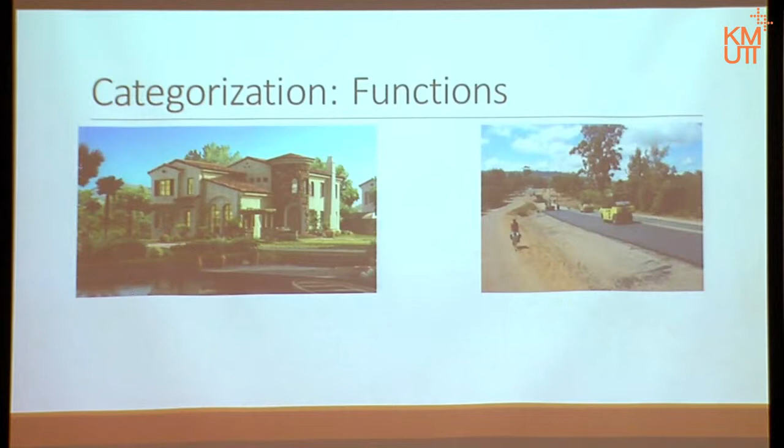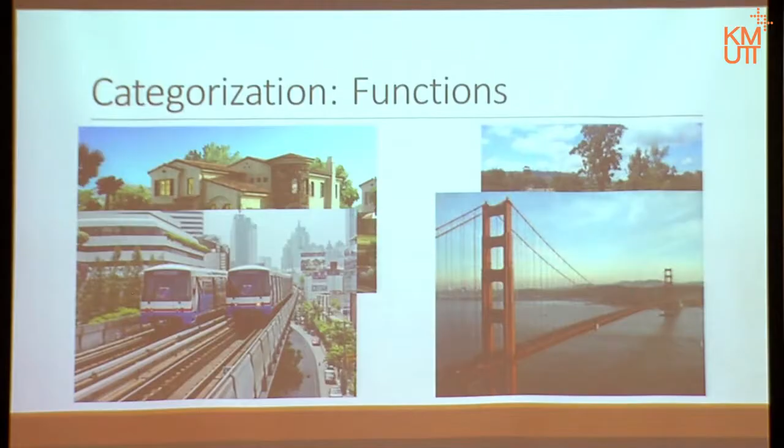We could categorize the structure or our work by its function. Maybe we could talk about accommodation, housing. We could talk about maybe some kind of transportation structure, like roads, or the mass transportation system. We could talk about bridges, of course, to go over water or between cliffs, or maybe even up to dams. These are all our work. As I always emphasize, our work makes civilization possible, but that is not really the point of today.

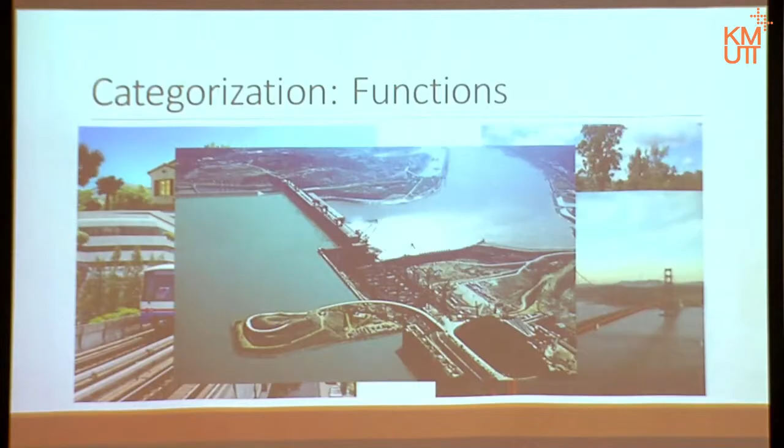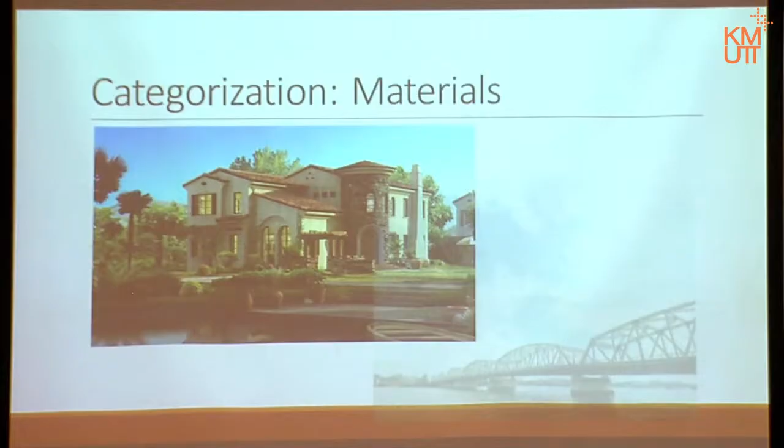How about we categorize it in some other way? Sometimes we look at it as materials. What material do we use? Bring back the housing - here we actually use structural material, reinforced concrete plus some stonework, masonry work. Some other structures might be more dominated by steel structure, like the bridges. Some bridges are kind of like trusses.

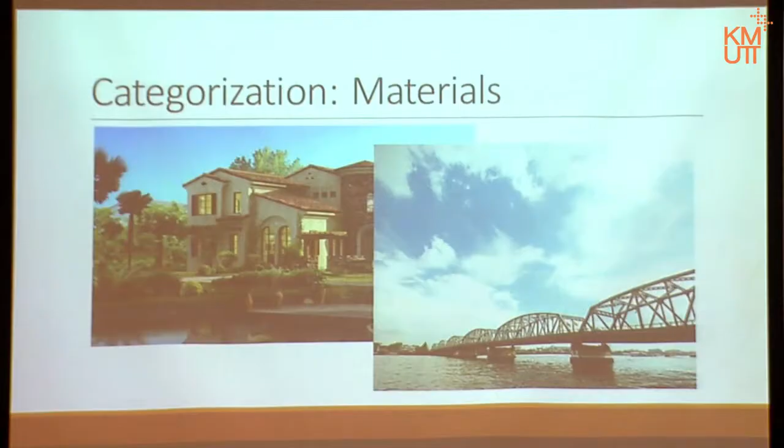How about what we have to do with it? No matter what you categorize, no matter how you call it - house, roads, bridges, or even reinforced concrete, steel structure - what do we have to do as a civil engineer? As we all know, the main task, the first task of a civil engineer or any engineer, is to guarantee the safety of the public. This idea of safety is related to the word strength in general, the strength of material, how much material can withstand force, and how they withstand the force.

One thing that might not be so well known as strength or safety is confidence, meaning whatever we do, we have to ensure the public that it doesn't fall, and they have to believe it doesn't fall. They have to be confident that the houses, the bridges, and all the transportation systems don't fall down. Not only do they have to be safe, they have to believe that they are safe also. What we actually ensure is what we call small displacement, meaning there will be very little deformation in our structure. The building you see actually deforms under loading, however it's so small, so slight, you can never notice it. That is what we have to assure.

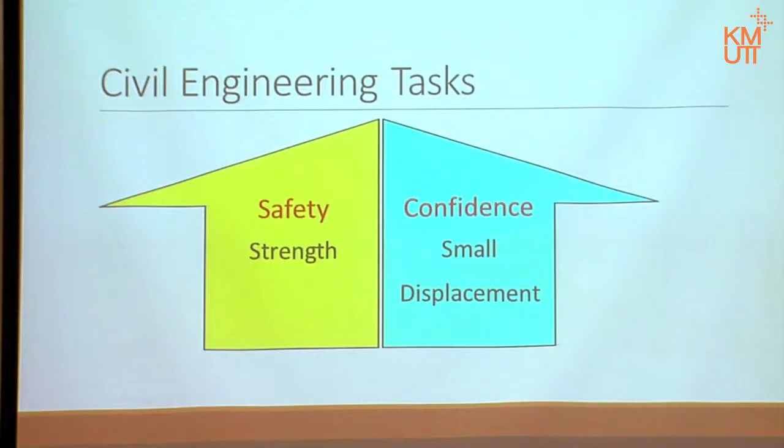A house needs a foundation. Our calculation, our learning, also needs a foundation. We have to understand the external forces system. Basically, there are some applied forces into our structure. We have to understand how the structure would react, how the support would react, to become the total system of external forces - applied forces and reaction from supports. And that is in our statics.

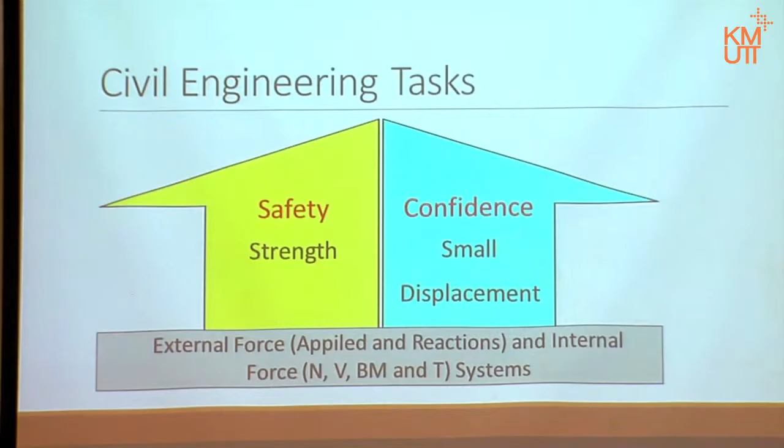We also have to understand, and be able to calculate, how this system of external forces affects the system of internal forces. We have done a lot of work in statics on internal forces. In fact, last semester we spent half a semester looking at these forces. Before we go on and use this foundation to calculate whatever we need for this course, maybe it's time for us to discuss what they are again, just to remind us what they are.

In general, in your study, we tend to talk about the two-dimensional world. Even though we are in a three-dimensional world, don't lose sight of it - the only reason you actually study the two-dimensional world is because it's easier to understand, but it's not the real world. You have to have the picture of the real world, the three-dimensional world, all the time. Yet, having said that, we start off with the 2D world first. When we calculate a two-dimensional problem, for internal forces, we have one axis of axial force, one axis of shear force, and one axis of bending moment.

We'll look at the physical side of it after we discuss the topic first.

Now if we expand the idea into the 3D world, from two axes of forces and one axis of moment, the third axis as I usually call it. We have a full operational three-dimensional world, meaning three axes of force, x, y, z, and three axes of moments, about x, about y, and about z. Therefore there are 6 of them. Of these, one is the axis of axial force, two are axes of shear forces, two are axes of bending moments, and one is the axis of torsion.

We will look at the physical side of it before we move on to the next topic.

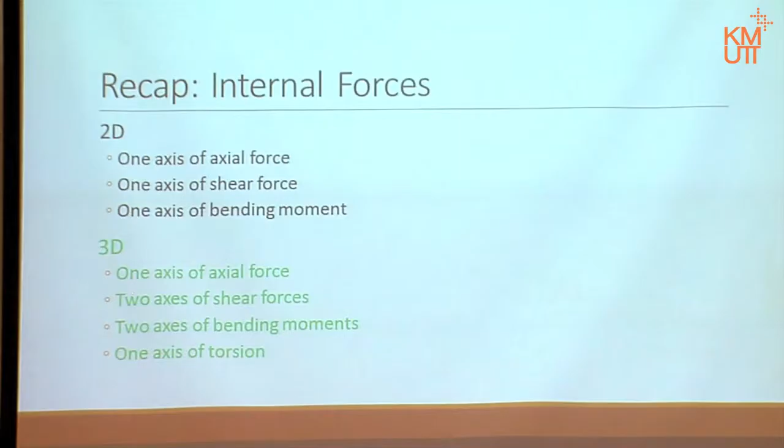Let's discuss the two-dimensional internal forces first. Think about this as x and y according to the material. If I turn the material this way, the alignment this way, think of this as x, this as y, and this as z.

Notice this dot here. If the material is continuous, I cannot pull it apart, thinking in terms of cross-section area. If you look at this side on the cross-section area, I cannot put the cross-section areas away from each other; it is attached. Whereas if the material is not continuous, just touching at the two cross-section areas represented by that dot, if I try to pull it apart, it can now simply go that way.

Notice that the movement of the cross-section area is 90 degrees to the cross-section area itself. This is the cross-section area, and the movement is 90 degrees to it, or sometimes in the same alignment as the material. If I can pull this apart and I cannot pull this apart, it means that with one piece of material, the two sides pulling each other to stay attached means there must be a force inside the material resisting the tension I'm applying. That force we call axial force, whether it's in the same alignment with the material or 90 degrees to the cross-section area.

Imagine this. The word axial should relate to axial forces, right? So let's imagine the simplest application. Just a piece of material. Could be rubber, could be a ruler, it could be any piece of material.

You pull it apart like that. If you look at the picture, you should realize it's guaranteed to be only axial. If the material is light enough, meaning we can ignore the self-weight, then there will be no shear, no bending moment. It's just pure axial force.

This is a three-dimensional picture. If we look at the front view here, let's say original length is L. Before you pull it, it's L.

Now, once you pull it, notice the word pulling it. The word pull means the material will be in tension, correct? If it is in tension, once it's subjected to the force, it must become longer, meaning there will be some change in length. Let's define it: delta is the measurement of the change in length, not the new length. The new length will be original length plus the change, L plus delta. The original length L, the change delta.

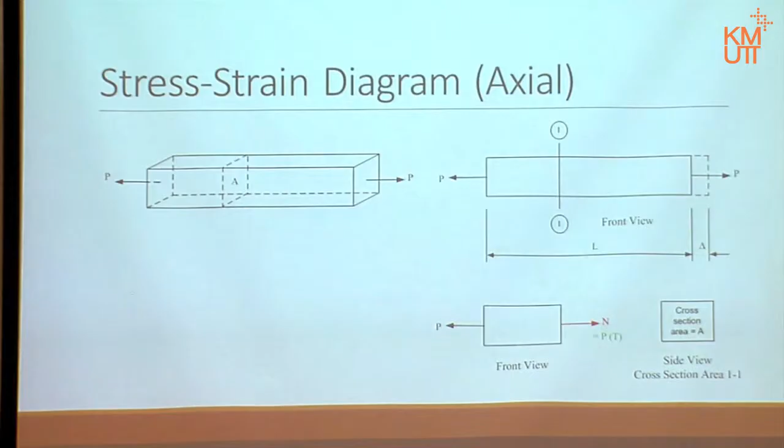Now, we know when we pull it apart, it becomes longer. The question is, so what? It doesn't help any calculation yet, right? We need a certain relationship between N and delta, and then we can use it, because we can find the relationship between N and P, and if we know N and delta, we can also link P to delta. So that's the idea. Now, how should we do it?

In this sense, it's not something you can just calculate. To get this relationship, apparently it has to be experimental, right? So basically, you bring a piece of material and then you pull it. You measure the force you pull it, which relates to N, right? And then you measure the displacement that happened. Maybe you pull it lightly, and then you measure delta. You pull it harder, and measure delta again, then plot the graph between N and delta.

Apparently they did it. And they get - well, if they don't pull it so much, they pull it lightly, release, pull it lightly, but harder and harder, right? Apparently they have a straight line. Better still, it's not only a straight line, it goes up and down, meaning you pull it, it becomes longer, you release it, it shrinks back to the same shape. And everything is in a linear line, which is nice because this relationship is a linear function, meaning the way you calculate it is quite simple, right?

They realize something though. The concept is nice. However, they realize if the material becomes bigger, cross-section area becomes bigger, what happens? Apparently, it seems like you need to pull it harder to get the same delta, isn't it?

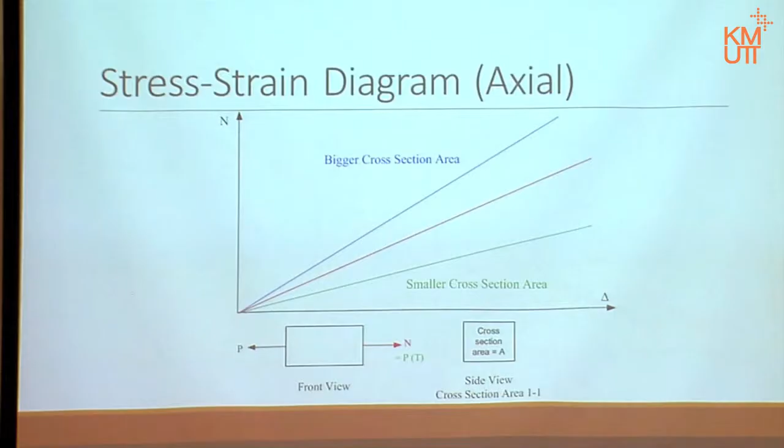So they have to think about this idea again, about this graph again. So they said, well, since the bigger area needs bigger force, maybe we can neutralize by dividing them. So maybe we change the idea of the graph. Rather than plotting axial force against displacement, can we plot axial force divided by cross-section area against displacement? Well, asking doesn't help, trying does.

So that's what they did. On one axis, now the vertical axis is no longer N, it's N divided by area, axial force divided by area. The horizontal axis is still displacement, the change in the length. Now they plotted. Apparently that three lines of graph we saw earlier become one line. Well, close enough - any cross-section area will have the same line.

Meaning it's not only bigger size and smaller size, it means that you could be in any shape - circular, rectangles, square, hollow tube, I-section, whatever. What matters is the area of the cross-section.

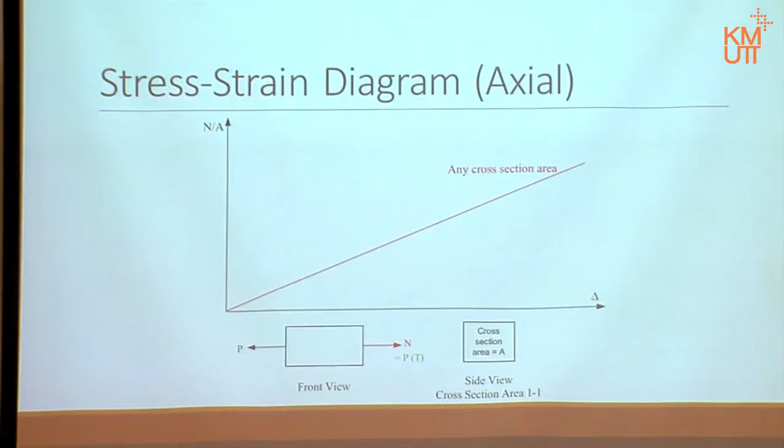So since this one is so useful, N divided by the axial force divided by the cross-section area, therefore is kept and defined by the word axial stress. The symbol we use is sigma to define the stress, lowercase s in Greek. And that stress, axial stress, is equal to the axial force divided by the area. The unit is obvious, force per unit area, and in fact we have stated that before.

Seems like everything is perfect. Seems like everything is peachy, right? If you want to know the displacement, you calculate N, the axial force, then you divide it by the structure cross-section area, then you can work out what delta is from the graph, or maybe some kind of straight line function. Simple enough. But however, they realize something.

Maybe it is not complete consideration yet. They think, if I change the dimension of the cross-section area, that is two axes, right? An area lies in two axes. What about if I change the other dimension we haven't actually tried? In this case, meaning the length.

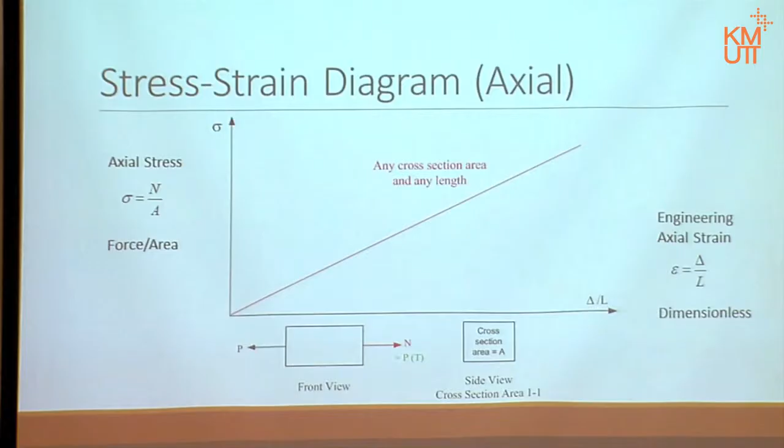So far so good. One problem: this is not the complete picture of this axial stress strain diagram. This is just the beginning part of it. Because as I said, we do not pull it so largely - we pull it a little, release, pull it a little more, release, pull it a little more, release. If we keep pulling it until it fails, the graph will be slightly bigger. Well, slightly - I think probably a lot bigger. This is the graph, the total graph.

The first section of this graph is the one we just discussed, the one that is a straight line function - this one here. It is called the elastic region. Why does it call elastic? Well, because the material behaves as if it is an elastic band. You pull it, it's extended, it becomes longer. Release it, it goes back to the same shape, exactly like an elastic band. In fact, if you change the stress to compression, it's still the same idea - you compress it, it becomes shorter, you release it, it goes back to the same original length.

Now, the second part - after you pull it up to a certain point, you will hit the plateau, the horizontal line there. That line meaning you do not have to add the force, the displacement keeps increasing. That one there is as if the material gives up. So that zone is called yielding. The word yielding means giving up. Basically it means the material doesn't resist the force anymore - the same amount of force, displacement keeps going.

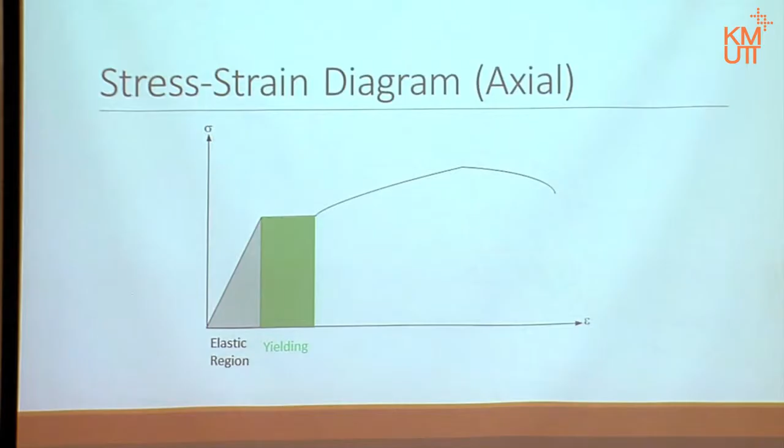And then the third region, it starts to be able to resist more force again. That one is called strain hardening. And then all of a sudden, up to the peak point, which is the ultimate strength, the material starts to lose the strength again, meaning the displacement keeps going. In fact, the force is reducing as well. This region here is called necking. For further detail, it will be assigned to you later.

Now, these are only axial forces, axial stresses, and axial strains. We know that there are some other forces, right? If we think in terms of cross-section area, the axial force and the shear force do not directly interfere with each other. It is 90 degrees to each other. Axial force is 90 degrees to the cross-section. Shear force is parallel to the cross-section. Therefore, it might be some other scenario.

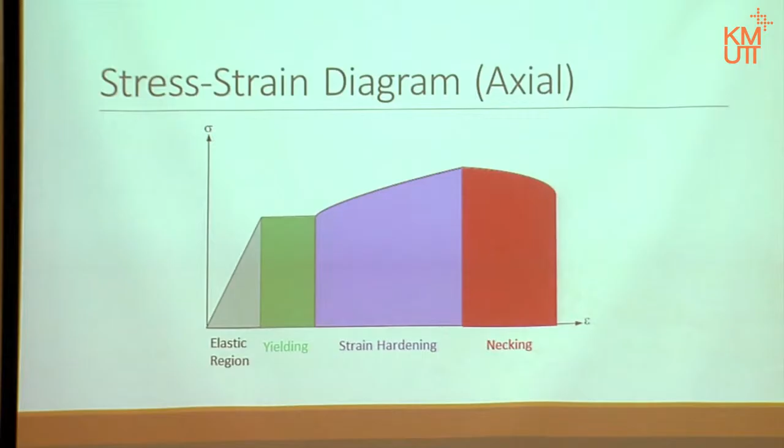Before we talk about the stress strain diagram for shear force, we will have to talk in more detail about how we calculate the shear strain. It's a little bit different from the axial strain.

Take a rubber piece of material and draw two parallel lines. This line represents the cross-section area deep into the material this way. One line is one cross-section, the other line is the other cross-section.

Notice that if we put direct shear on it, nothing else, try to slide it up on one side and down on the other side. Notice the movement of the cross-section: one will just go up, one will just go down, no rotation, straight up and straight down on both sides. That is the real phenomenon of the physical world when subject to pure shear.

Once we put pure shear force on it, within those two lines, one line moves up and one moves down. Let's assume the one on the left goes up and the one on the right goes down. It could be swapped, but let's stick with this picture. Once we displace it, it looks like so.

Notice that L doesn't change, L remains about the same. What changes is the level, so delta, the displacement, doesn't happen parallel to L anymore. The delta is in fact 90 degrees to L.

Now if we calculate the strain the same way as before, but this one is shear strain, we talk about delta over L, the same idea as before. Just to be clear, we change the symbol from epsilon to gamma. You will see later why.

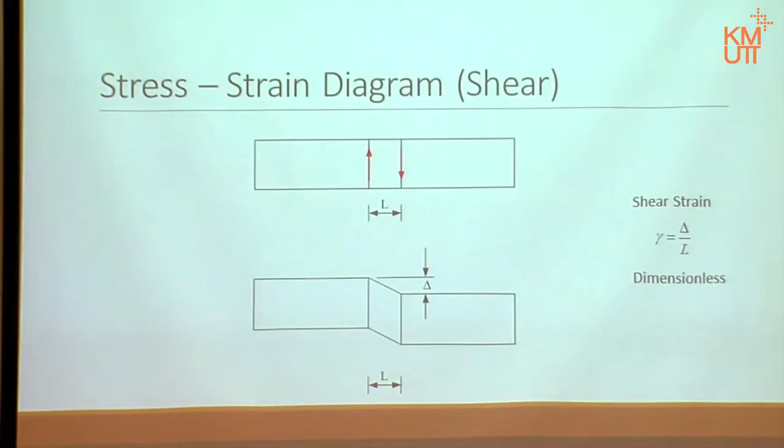Notice that gamma is still displacement divided by original length, meaning length over length, so the unit becomes 1, meaning it's dimensionless. But we are still inside small displacement. If we divide like that, and delta is really small, in fact we are talking about the angle gamma here. Gamma is the angle there. Since gamma is an angle, dimensionless, we have a name for it: it is called radian.

Therefore, the shear strain is dimensionless, is an angle, and the unit is radian.

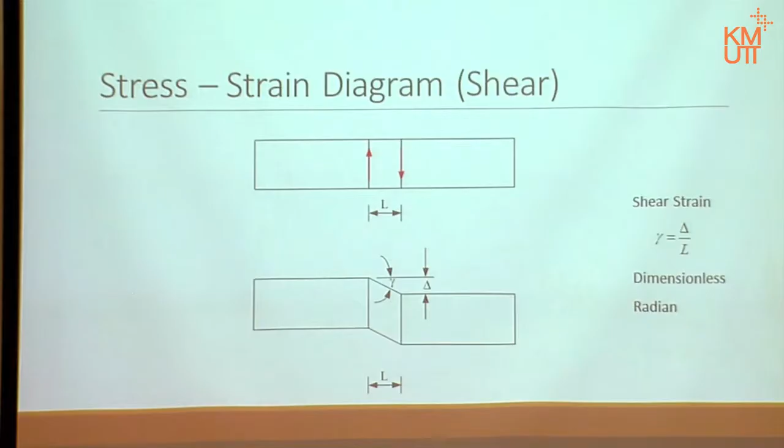Now once we identify how we calculate gamma, let's see the graph. Similar to last time, just without the horizontal line. These are the key points in the stress strain diagram for shear. Tau is the stress, gamma is the strain.

Moving along the horizontal line from left to right, the first point we hit is called PL, subscript PL, from proportional limit, because the stress and the strain are proportional. In other words, it has a straight line, linear relationship between the two.

Then the second point is when the shear stress becomes the maximum of the graph, called the ultimate: if it's stress, the ultimate shear stress, if it's strain, the ultimate shear strain. Then the last point, before the point of breaking, is the fracture shear stress and fracture shear strain.

Again we will have a beginning section, the proportional limit section, the same idea as axial strain, which is the elastic zone.

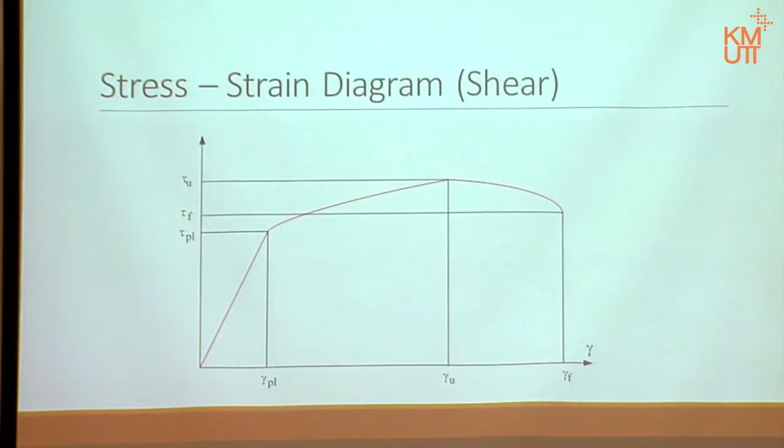That is just the tip of the iceberg yet. This is what you should read. On these two diagrams, I just presented a rough idea on how they can be built and what each part roughly means. However, there are many details that you should read up on. They are all in any mechanics of materials books. You could choose your reference.

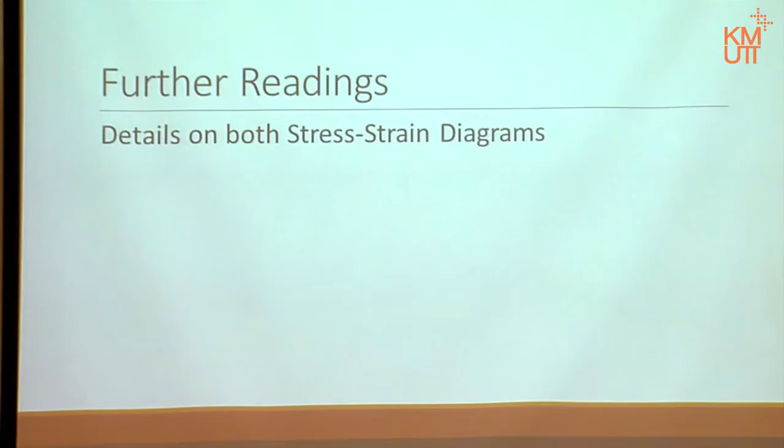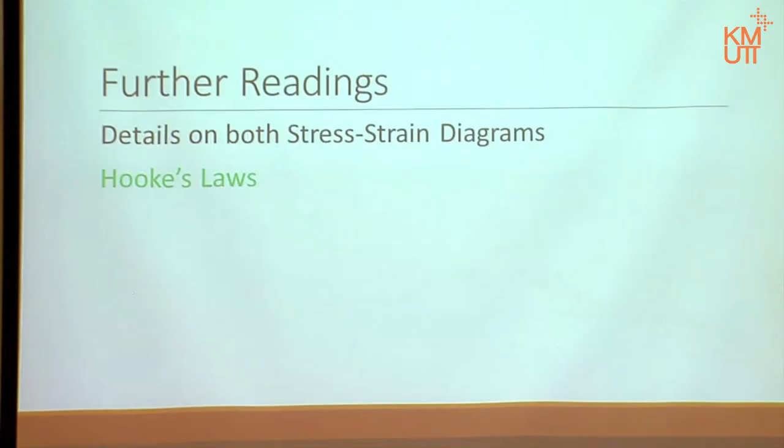I would like you to read further on something called Hooke's Law. It will be directly related to the axial stress strain diagram. Then, the shear modulus of elasticity. If you read the book about the shear stress strain diagram, they should be discussing shear modulus of elasticity on the same page or very close by. Find it.

One more thing, the Poisson ratio. This is an overview of what happens to the material once it becomes longer or shorter. Four topics in total that you should read.

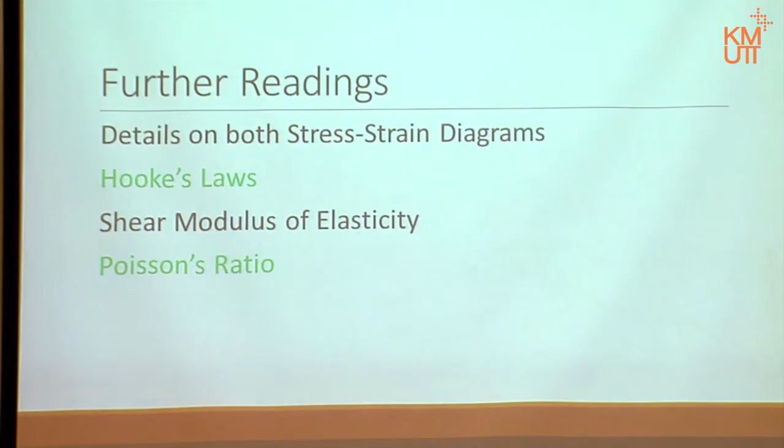We come to the end of this lecture, so let's summarize what we have done so far. First, I presented why we have to study mechanics of materials, because it's linked directly to the tasks we have to work on in structures. Then we gave an overview of the mechanics of materials subject, very short, just one page apparently. Then we discussed in further detail the stress strain diagrams, plural, because there is one for axial and one for shear stress. And some further reading has been assigned to you.